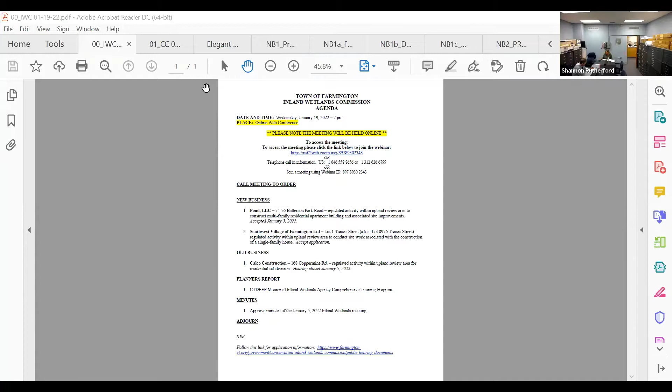All right, so first item on the agenda is Pond LLC, 74-76 Batterson Park Road. The applicant is here.

Is there anything they would like to present this evening? No, Mr. Chair, it's Tom Daly with SLR. As the commission knows, we went through a thorough presentation to this commission at our last meeting. With me was also Megan Raymond, who presented the findings of her report.

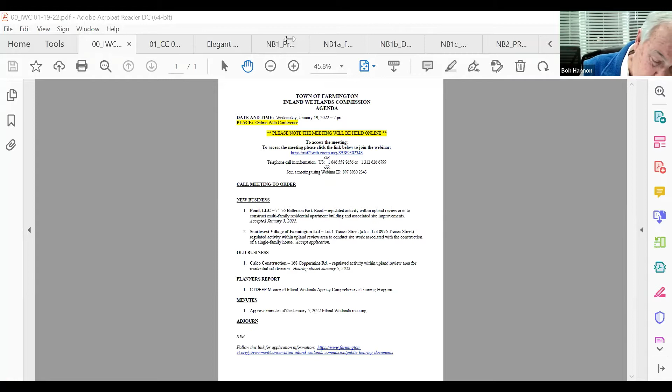So at this point, my understanding is the commission did a field walk, and we're here to answer any questions the commission may have. Yes, we did do the site walk. I'm just jotting down a couple of notes I have to remember for tonight's meeting. Bear with me. One is we have to render a decision on whether or not it's a significant activity or not, so I wanted to make sure I didn't forget to bring that up.

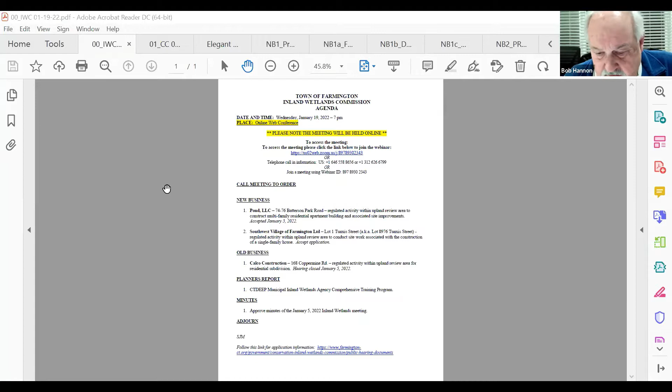I guess the applicant did make a pretty thorough application last time, so I guess we'll just start. Rich, I'll start with you to see if you have any questions, comments, or concerns about what was presented and if there's any information you're still looking for. No, I don't have any comments or concerns.

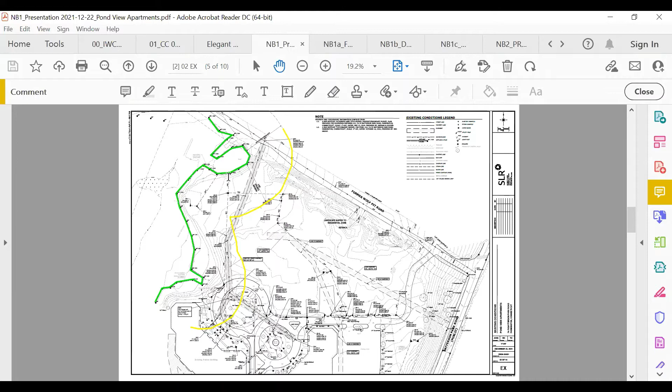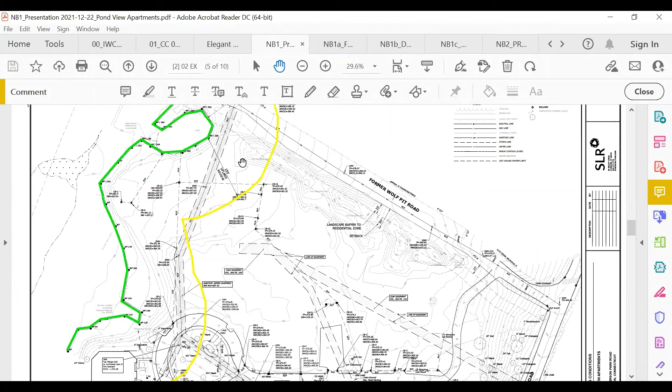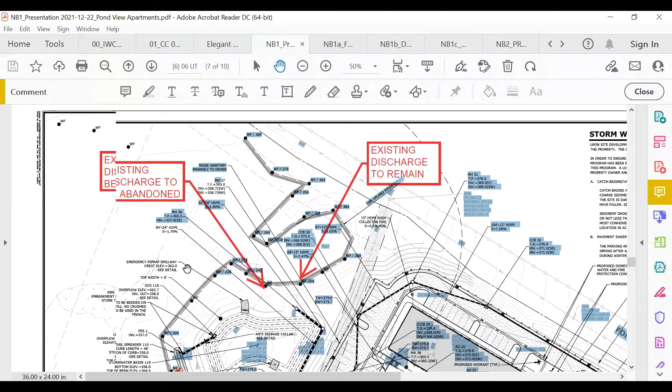The only concern I have is with the existing drainage that makes its way to the pond. I don't know if there are any sediment removal devices or hoods or things that would normally be included in a new application. In the presentation, you made notes of things you're going to do for the new development, and I was wondering if there was any consideration of retrofitting what's already there, since it discharges to Batterson Pond.

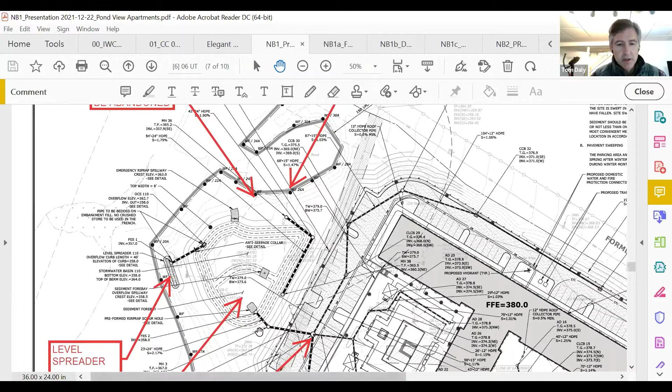For the record, once again, Tom Daly, and your point is well taken. Yes, you're probably right that things we were doing back in the 80s are probably not as good as what we're doing today. I think there is an opportunity, as you can see on the graphic below, we're rerouting the stormwater around the basin.

There might be an opportunity right where we hit the second or third manhole - the question is, could we pull back the outflow and put a sediment trap right there, pull it back and do more of a level spreader like we're doing for the new construction. That would provide some sediment containment just before it goes into the old pond. I think we could definitely accomplish that.

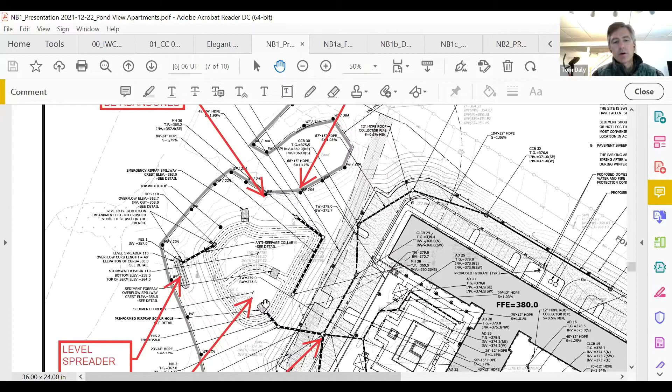Okay, how about the outfall from the office parking lots? I'd have to study that - obviously we didn't look too much at the old drainage discharges. I believe most of the water goes over to this area, but we'd have to do a deeper dive into the survey and find out what the discharges are. Okay, that's all I have.

Thank you. But we could work with town staff to see if we can do some retrofits. At a minimum, I think we can probably put a hood on those final discharges before they get out to get more sediment containment. Thank you. Thanks, Rich. Dave?

Yeah, I just had a couple of observations from the site walk. The old sedimentation basin, or small pond, in the northwest corner - we noted that the outfall leading towards the big pond closer to 84 was really clogged up with brush and fallen trees. It would be a good chance, I would think, to remove that impediment to flow.

Actually, Bruce called me about that, and we would have no objection to getting in there and cleaning it. Bruce was thinking that some of the trees fell down and were causing a little bit of backwater on that outfall. So when we go into this basin, we can strategically get in there with minimal impact and clear out that old brush. I think we can probably all agree it hasn't been maintained over the years, but we would have no objection to getting in there and cleaning that out.

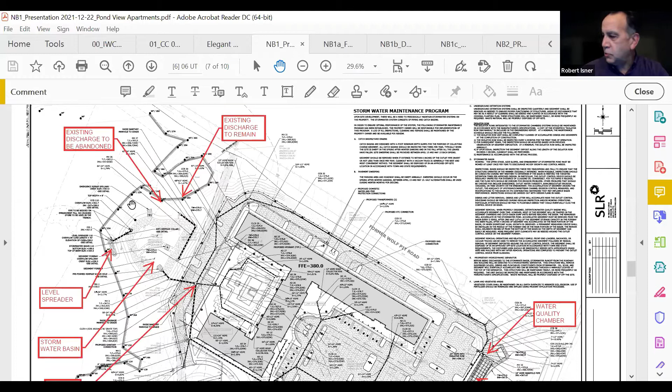Tom, I did have a question. There were a couple of catch basins that were in the field. Are those all going to be abandoned and removed? Yes. Okay, and then just from a safety perspective, the top of the catch basins are open, so they could trap some small wildlife or could injure someone if they're walking through the woods.

So even on a short-term basis, the tops of those catch basins should be covered. Okay. Bob, for discussion, or Commissioner Hannon, Chairman Hannon, for discussion purposes, I would not view this as a significant activity. It's certainly a regulated activity because of proximity to the wetlands, but I wouldn't view it as significant.

And then my final comment is with good soil and erosion control measures properly implemented and working with the town staff, there should be minimal impact during construction. And that should alleviate any significant or any potential impacts to the wetlands. End of my comments.

Thanks, Robert. Neil? Yeah, I don't have anything additional. Okay, thank you.

Mark? I would repeat what previously people said about what I saw on the site walk, the old drainage system going into the basins. Obviously we noted previously that it's blocked, but the whole system should be reviewed just to make sure it's functioning properly because it could have an impact on this project. That's it.

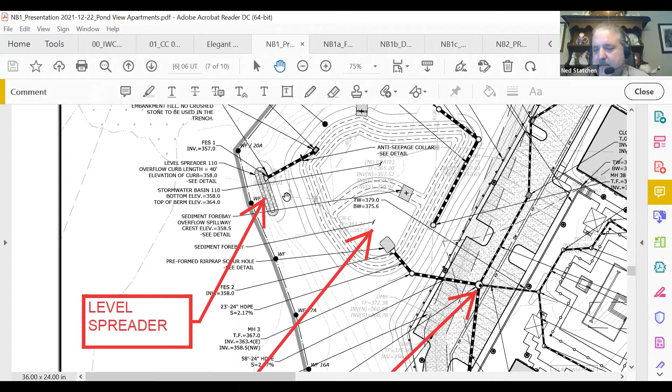Thank you. Ned? Yeah, just to recap, the pipe that we were looking at, that carries the water from the other section, that was about half full, and I'm sure it's not designed to flow like that. There's standing water, so the elevation of that drainage pond must be higher than it's intended, which is a result of the down trees and other things that are blocking the area.

So I understand that it's kind of separate from this project, but it is the same owner, so I think he should take some responsibility in maintaining that. And I think, you know, if that sedimentation basin isn't working properly, then it can affect the other one, the one we're putting in now. But yeah, I think that's all, really all I had.

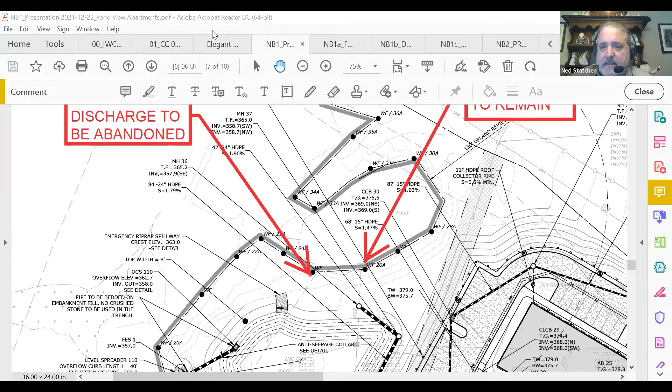I think that, you know, we talked about the catch basins and some of the debris that's there. I haven't made up my mind whether this is a significant activity yet. I'll just see where this goes a little more. Thank you.

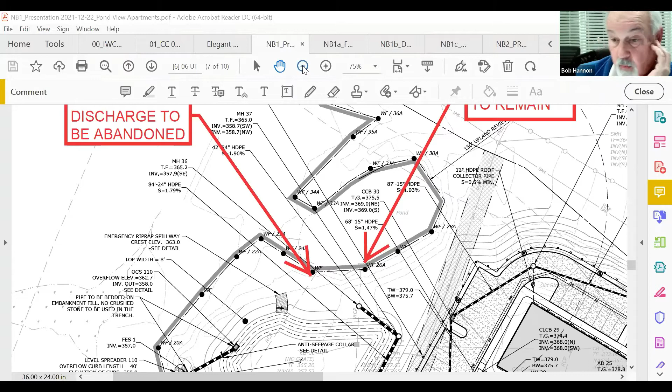Okay, thanks, Ned. I don't have much additional. The one thing I'm wondering though is because it looks as though, based on the mapping and what was done, a lot of this property was cleared back in the 80s and work really hasn't been done subsequent to when they put in the two buildings.

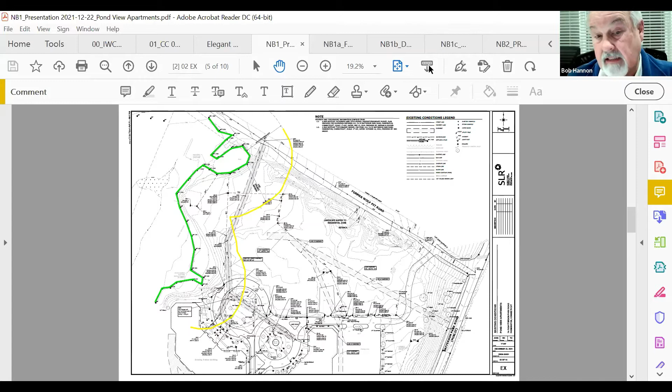One of the things that may need to be done is to provide more of an access point to that area, that small pond, so that people can in fact get in there periodically and maintain it. It's pretty overgrown right now. There's a bunch of trees right along the edge that are leaning into or falling into that pond.

But I think the bigger point that we need to deal with is where there's a large tree down and it's the outlet flow from there, which is why I think things get backed up in the pond. Like Ned was talking about, the amount of water that's actually in the pipe itself. And you get the ice on it, you know, the pipe is already half full, which my guess is it was never designed that way. So that's something that may need to try to work out.

I agree with Robert. I don't feel as though this is a significant activity.

The area has been looked at. I just think we need to make sure we clean up some of the things that haven't been addressed over the years from a stormwater perspective. But other than that, I don't really have any other questions. I think everybody else pretty much commented on that.

So Ned, you may have to make up your mind soon, because one of the questions I want to ask is what people's preference is as far as this being a significant or non-significant activity. Like I said, my take is non-significant. Robert said non as well. So I'll start with Rich so you can think a little longer, Ned.

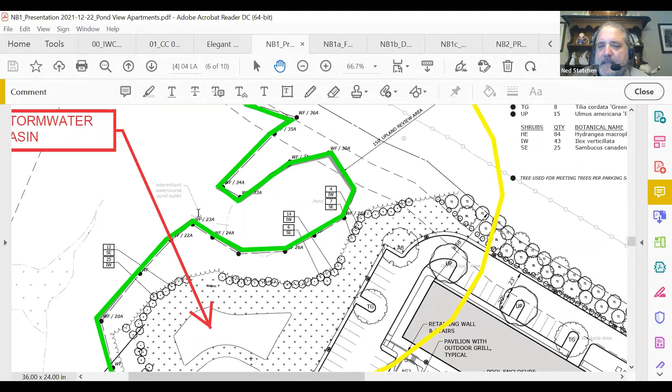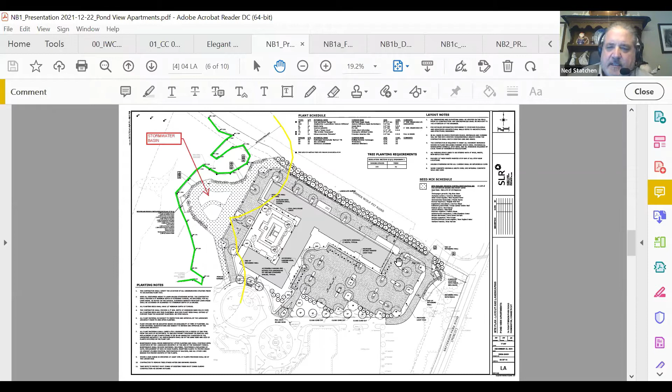So Ned, have you made up your mind yet? Well, my concern is the overall size of the project and the fact that half of the property is draining into a publicly utilized pond, Patterson Park Pond. I think if something were to go wrong with the water flowing into that pond, people are going to be pretty upset about it. I know they've got the drainage and the underground sedimentation collection on that side. So, all right, I guess I'll say it's not significant.

Okay, so it looks like the consensus is that this proposal is not a significant activity. Can I get a motion to that effect? So moved, as a regulated, non-significant activity. Is there a second? Mark seconds. I think everybody's pretty much voiced their opinions, so I'll just go straight to a vote. Those in favor of categorizing this application as a non-significant activity, signify by saying aye. Aye. Opposed? Abstaining? Okay, that takes care of the first issue.

What's everybody's pleasure? Do you feel comfortable enough to render a decision on this? We have notes that came in from the town. I haven't seen any engineering comments on this recently. Is there anything that's changed on that, Bruce? Are we up to date and current? Yes.

And is town staff content with what's being proposed, and have any comments been addressed? Yes, we had some minor comments in the actual agenda review. Okay, and I think they were all just minor. Oh, I apologize, not on this one — it was just an item to be discussed. I apologize.

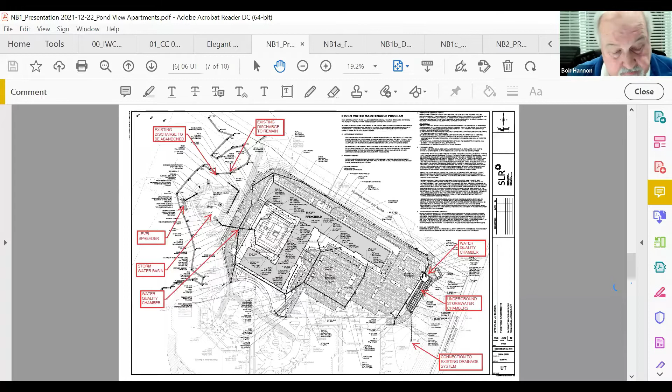Dave, anything you can think of? I agree with Rich about updating the old development, and maybe we should wait until the next meeting to see what the applicant comes up with in that regard. Okay, thank you. Robert?

I agree with Commissioner Fox that we're probably best waiting until the next meeting. I do think the assessment of the existing drainage system along with the proposed system is significant enough that we should get the assessment from the applicant's engineer and allow our town staff the ability to review and hopefully reach concurrence on no change, or what should be changed.

Tom Daly, if you can provide insight on the plan for clearing the debris and lowering the water level, and where the outfall for the proposed drainage is, that would be useful for our consideration at the next meeting. I agree with Chairman Hannon that we should include an integrated pest management plan with our approval, along with removing the heavy equipment tire and securing the open catch basins on the existing system.

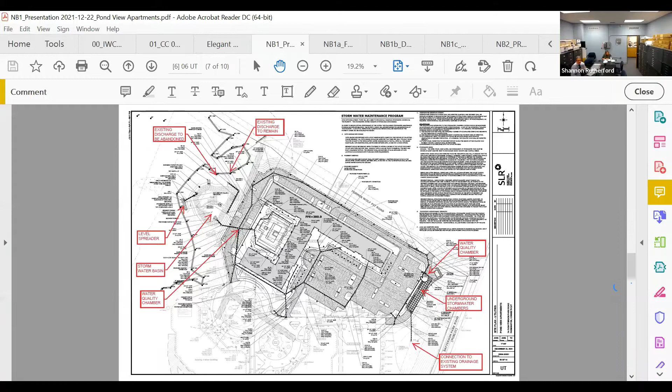Ned? I noticed this project was in the Farmington Valley Press this week, and I was wondering, David, has the town gotten any calls on it? No, I have not received anything. I agree with everybody that we should make sure the applicant has a chance to fully address our concerns, and then we could act on it in 2 weeks.

Thanks, Ned. I agree also. I think it's important to get a better understanding of what can be done with the existing stormwater system and maybe get that more up to date, because we've seen that area has not been maintained. I want to make sure what we're dealing with going forward is more consistent with today's standards.

Tom, do you have any questions? No, I'm clear as to what the commission's looking for. Is that something you think you can get, talking to town staff in a relatively short period of time? Yes, with clear indication, yeah.

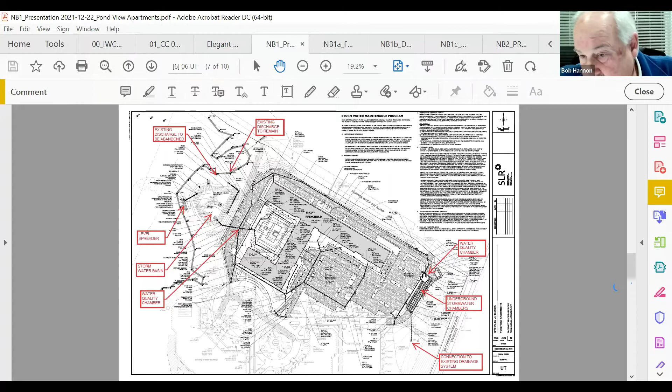Okay, based on what I'm hearing, we'll continue this to the next meeting with no vote tonight, but we did vote that it is not a significant activity, so we do not need a public hearing. Thank you very much, appreciate it, see you in 2 weeks.

Next on the agenda, Southwest Village of Farmington Limited, Lot 1, Tunxis Street. This application just recently came in, right? Yes, the activity today, if anything, would be just to accept the application. Exactly.

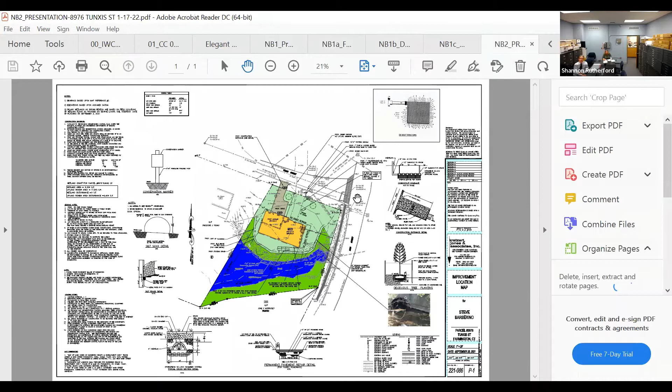Sev, are you on? He was on, I saw him earlier. I think you may be muted. Yeah, I'm gonna work on getting him unmuted. Can you hear me now? We got you, Sev.

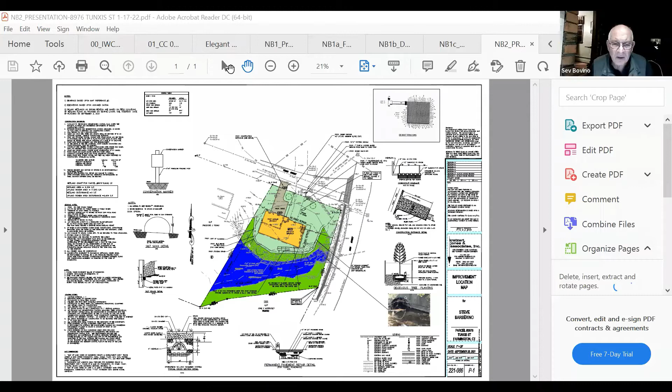Okay, thank you. Good evening, Mr. Chairman, Commission members. My name is Sev Bovino, planner with Kratzert, Jones and Associates, representing the applicant. The property in question is located at the corner of Main and Tunxis Street, identified as parcel number 8976 on the assessor's map, in the southwest quadrant of the intersection. As shown on screen, the top of the sheet is north, and that is Tunxis Street, and to the right, east, is Main Street. The land area is 24,171 square feet.

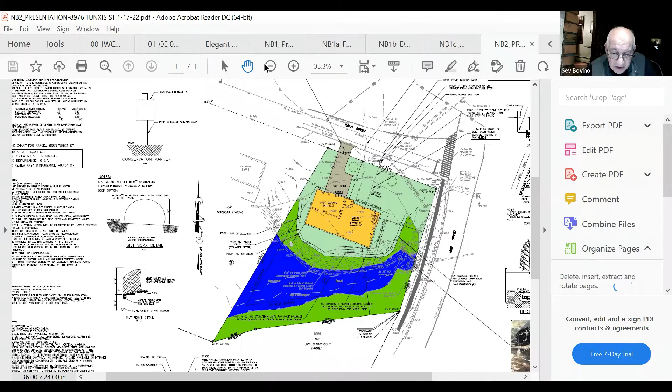It includes wetlands associated with the brook that runs east to west in the southerly area of the property, shaded in blue. The northerly portion of the property is rather flat, up to the top of slope, then drops to the brook about 11 feet. The house is proposed in the flat portion of the property, close to Tunxis Road. The house, driveway, and proposed utilities will be in the 150-foot upland review area.

The disturbance is 9,454 square feet of the 17,815 square feet of upland review area encompassed on the property. We do not propose any wetlands filling or disturbance.

A soil report by George Logan was submitted with the application. The upland soils are udorthents. The wetland soils are Saco soils associated with the floodplain along the brook. All appropriate notes and details are shown on the plans. We received staff comments and do not object to them; the map will be revised to reflect the changes addressing the concerns.

One of the comments relates to the setback along Tunxis Road. That was a surprise to us, but we're happy we can move the house closer to Tunxis Road. Currently the house is 41 feet from the street line; we propose to move it to 30 feet to comply with all setbacks and have plenty of room from the front of the garage to the roadway, so cars do not encroach or sit close to the roadway.

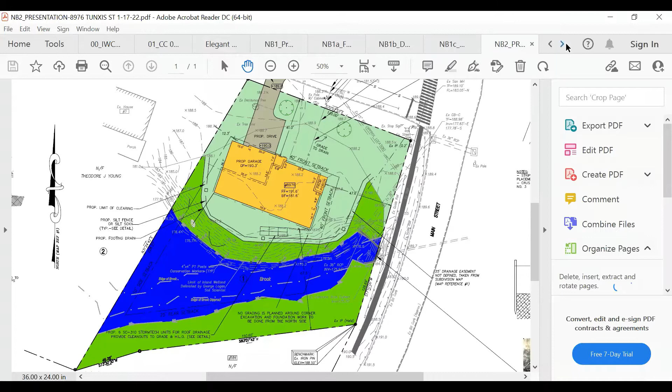The non-colored map that was submitted has the conservation easement as contiguous with the wetland boundary. Yeah, we have no problem with that. Is that what you're proposing?

Yes, I don't think they depicted the conservation easement, if you don't mind if I interrupt, because that was one of the comments I had: where exactly is the conservation easement? I think there was one arrow pointing to it, call it a marker, a 4x4 post with conservation marker, pointing towards... oh, there it is, yeah, it's right on the wetland flags. All right, yes, I missed it.

It is there. I think it would be more appropriate to have it at the top of the slope, because if you start making deposits of material or clearing, whatever disturbance is going to quickly get into the wetlands. So it would be much more protective to have the conservation easement there. We have no objection to that. Okay, that's all I have, thank you.

All right, thanks Dave. Robert? I agree with the comments by Rich and Dave. Is this an actual house dimension, or is this just a schematic as to what's going to be built? No, this is an actual house dimension. There's an actual house plan that was developed by an architect. We first had a basic box, like a rectangular shape, but this is an actual house.

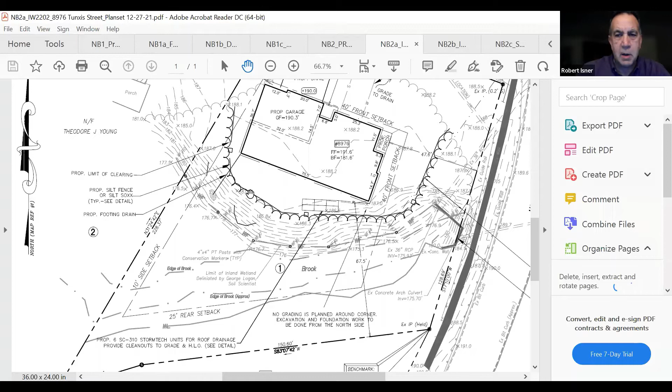Okay, thanks Robert. Neil? Just to clarify, this map, you're going to move the house from this location - did you say about 11 feet towards Tunxis? Yes, the back range of the house would be probably right here. This dimension here is 14.7, so if we move it 11 feet, the back range will be just about right here, so there'll be room to come around.

Okay, and you're not twisting it at all, it's just the whole thing's going to shift? The whole thing is going to shift towards Tunxis Road. Okay, all right, thank you. Nothing further. Okay, thanks Neil.

Mark? I have nothing to say. A lot of questions have been asked, and the answers are, I got my answers. Thank you. Ned?

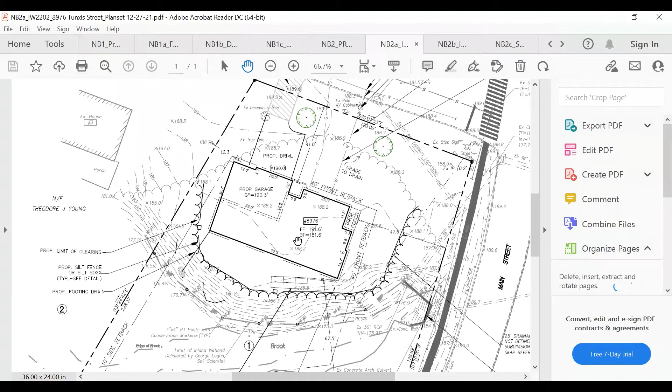I assume the steep grade, elevation lines that come past where what's going to be the area left alone with the brush lines there, those are just going to be flattened out, or because I don't see any new contour lines.

Yeah, we're trying to keep the grades as close to the existing grade as possible. And actually, Bruce requested that we show some spot grades, which we will on the revised plan.

You can see the proposed floor elevation is 191.6. The existing grade around the house is 188. So normally you got 3'6" from the grade to the finished floor, 1 foot for the deck, so you have about a 2.5 foot drop from the top of wall to the surrounding grade, which will allow a few steps or a small patio to be used back there. So it works well with the grades.

Okay, and the other thing is, we have a steep grade here, and I've seen this pond really get ripping here, this river, brook. Are they going to do anything for slope protection on this?

Yeah, we're gonna have a silt fence, mulch log, and obviously it's gonna be seeded to stabilize the area. We're not gonna touch the top, the banks themselves. They're already vegetated, and there's some growth on it.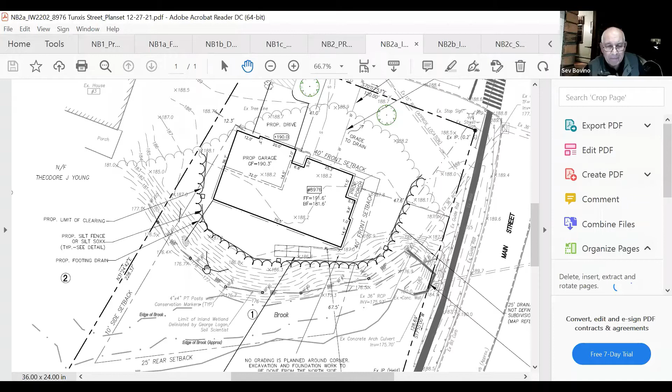Okay, that's all I have. Thank you. Okay, thanks, Ned.

I'm making an assumption on this, but based upon looking at the topography, I'm assuming that this lot has been filled in a long time ago. This is a lot of record that's been like this for many years. The growth on it, we have trees that look like they could be 60, 70 years old.

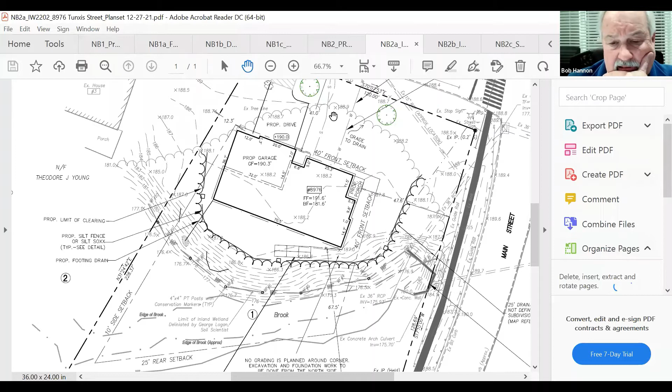Okay. Yeah, I mean, I agree with the comments from other folks. And again, it looks like, just trying to, yeah, the one thing that might be able to do is work with the town staff.

I'd like to see a little more detail about where you've got the proposed clearing down at, I guess it's the southeastern corner of the site, where you're clearing some of the slope. I'd just like to see something there to figure out how that's going to be stabilized a little bit more while any work is going on.

Because again, I think with what you're talking about as far as the growth that's on the embankment, you are better off leaving that there. It stabilizes the soil, makes things a lot easier to deal with, and it's been like that for a while. So I don't think it would be a good idea to start changing that.

But I'm just curious as to how that area in that southeastern corner is going to be addressed. So that might be something you can pull together, just some general information for the town staff, for stabilizing purposes. We could, Mr. Chairman, place some modified riprap here to stabilize it even more.

And the house is going to be moved 11 feet, so there will be an opportunity there to do something there. And actually, we can move the limit of clearing from here, move it up closer to the top of the slope in this area.

And that's kind of where I was going with it, because we've typically done, like in other sites where we've had conservation easements going, we try to prefer the top of the slope, so that hopefully you eliminate people's intention of disposing of things on a slope where it's out of sight, out of mind, and don't particularly want to do this with the brook down below.

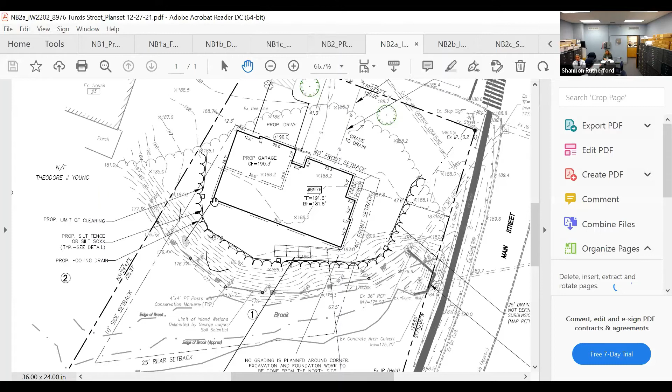And one of the other things, I don't know if you discussed it, was the clearing of some of the fallen trees on the property that can possibly help with the runoff flow. Yeah, we discussed that as well, and they have no problems doing that. I put that in the draft resolution. That should be done as part of your initial clearing of the property. I don't want to wait for that - let's get that opened up as soon as possible.

I guess at this point I'd like to take the commission's temperature about how they feel about the application. So Rich, start with you maybe?

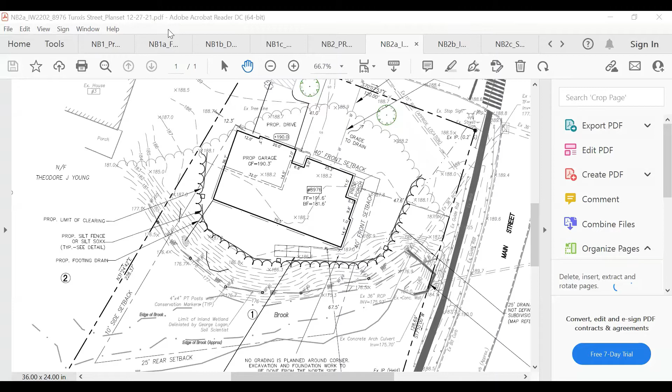There, finally unmuted. I think the applicant has gone to great lengths to try to infiltrate and not create problems for the neighbors as much as I think is possible. So at this point, I really don't have concerns with this proposal.

Okay, thank you. Dave? I guess I had one follow-up question for Bruce. With the various sump pumps that may or may not be needed, and infiltration of roof runoff that may overflow, are we confident that the new enlarged basins are big enough that there won't be an increase in runoff? At this point, yes. There's not a very good way to actually quantify the volume of water you would anticipate from that, but we did enlarge the systems quite a bit - I think about 30%. We had them do that for each one, and on top of raising these, trying to get them more out of the groundwater. So for footing drains and sump pumps, that should actually help as well.

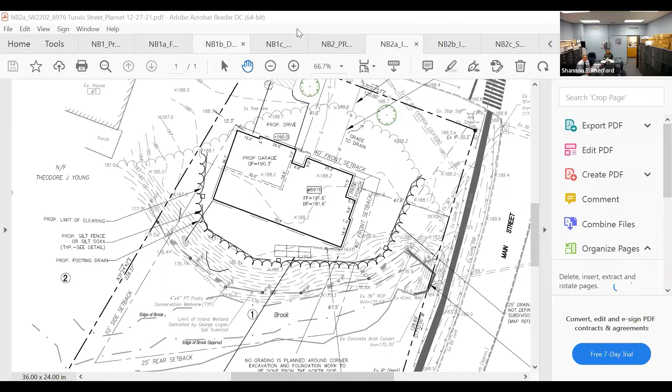Okay, thank you. Yeah, so overall I would agree with Rich that the applicant's done a really good job trying to deal with the stormwater issues. I looked back at the denial from 2015, and they've obviously done a lot from that perspective as well - a lot more vegetative buffer, keeping the basins mostly outside of the canopy, mimicking the existing drainage patterns that flow towards that water course. I think that provides a lot more protection to the cold water tributary of the Unionville Brook. So yeah, I'm fairly comfortable at this point as well.

All right, thanks Dave. Robert? I also have a question for Bruce. You said you're still reviewing some potential redesign of the footings and sumps for some of the basements - is that an ongoing review? Yeah, that's kind of more, as we were saying with them, it felt more of an out-of-wetlands review at that point, more of an engineering and TPZ review. So that's kind of how we worked with it. They're not going to be submitting any revised plans because we can't accept anything at this point, but the understanding was that we'd work with them and they would look at raising those basements up a little bit just to get them outside of that high groundwater. Great, thanks, that's very helpful clarification.

I think we spent a lot of time going through the application. We've heard a lot of information, so I'm going to put on my wetland regulation blinders and look at the project from a wetland regulatory perspective and a wetland impact perspective. In doing so, I think the project has been appropriately designed. I think the conditions that have been drafted reasonably address all of the concerns to the extent that we can. There were some hypothetical questions or concerns raised by some of the neighbors, who I understand have concerns, but I don't think the speculation is enough to warrant an adverse decision or denial of the application. So, subject to further discussion with other commission members, I would be leaning towards working with the draft motion to approve the application. Those are my comments for now.

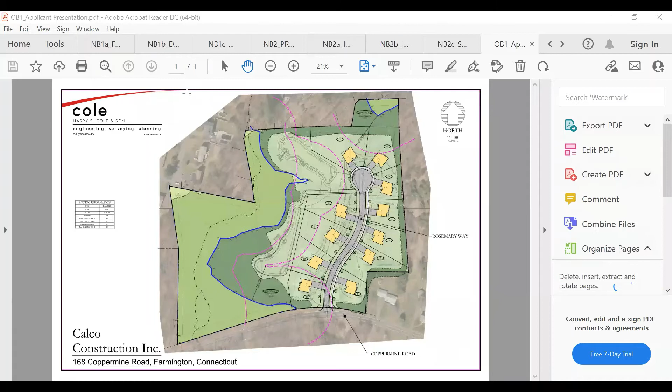But from a wetlands point of view, what they're doing with the basins and how the water is being captured and mitigated into those areas minimizes the impact on the area. I think from a wetlands point of view, this project meets our standards—they're taking due diligence to make sure the impact to the wetlands is minimal. So I see this as a project that can go forward.

Thank you. All right, thanks, Mark. Ned?

I do think they made some efforts in trying to better situate the homes on smaller lots. But I think the biggest problem here was that they just tried to squeeze in too many homes. I really wish they had gone from 12 to 10 instead of 12 to 11, taking that last one on the cul-de-sac out, giving it less runoff—even maybe taking both of the end ones out. That would have been a better way to address this. I understand they're trying to get as many homes on there as they can.

But I think it would have been better handled by cutting more than one house out of the project in the redesign, and they didn't do that. So I don't think they've gone as far as they should have in trying to redesign this project.

Okay, that's it? That's it. Okay, thank you.

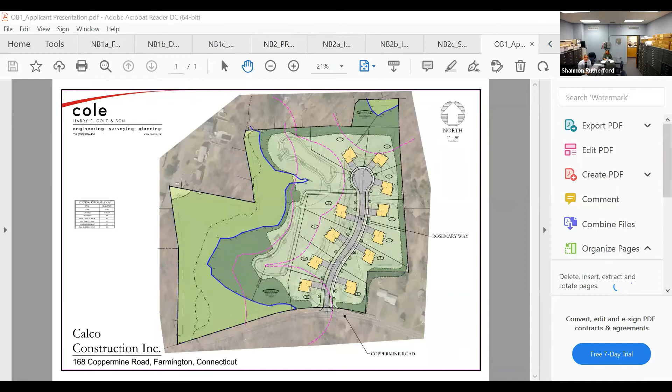One of the questions, Bruce, I have for you is because one of the original issues was hooded catch basins for sediment control—are all of the catch basins here proposed to be hooded, or just one or two? Just a couple. They're going, if I'm not mistaken, with all 4-foot sumps.

Give me a second here. Well, no, that's okay, because my take is going to be a condition I would like to see—I would like to see all the catch basins hooded. All of them? That's one of the things we originally looked at. I think we need to be consistent with that approach. So that's why I'm bringing that up.

I think they've gone in and increased the use of low impact development principles. I also like what they're doing in terms of the level spreaders and how they're trying to infiltrate water from that. There are other issues I could go into, but I think a lot of the stuff has basically been addressed. So I do feel as though the design proposed at this time is much more suitable for the site than what was originally proposed.

And this is the project—I actually had to take out my hydrology book to look at some stuff. So thank you for helping me get the dust off of one of my books.

But I'm fairly well satisfied with a lot of the work that has been done on it. Whether it's 11 houses or 10 houses, that's outside of our jurisdiction. That's really going to be planning and zoning. So it could end up being 10, I don't know, but that's not the wetlands issue. So I'm not going to really focus on that.

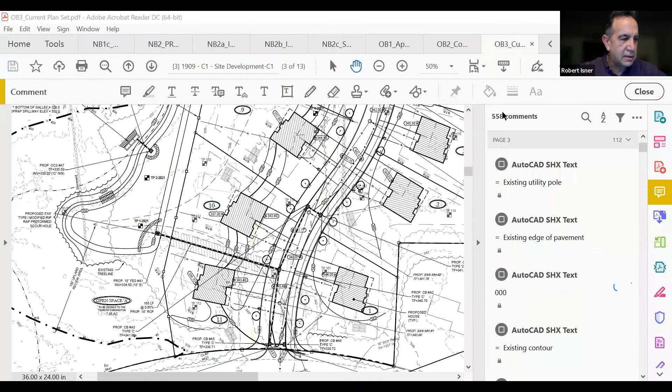Sorry, I wrote 20, Shannon and I wrote 21 of these things. I've gone through them so many times.

No, that's the clearing of the fallen trees and other debris in that wetland area. He's talking about the lot area itself, I think, right? You mean up in the lot area, back up in here? Yeah, well, you've got the barn and you've got a lot of agricultural materials left on site.

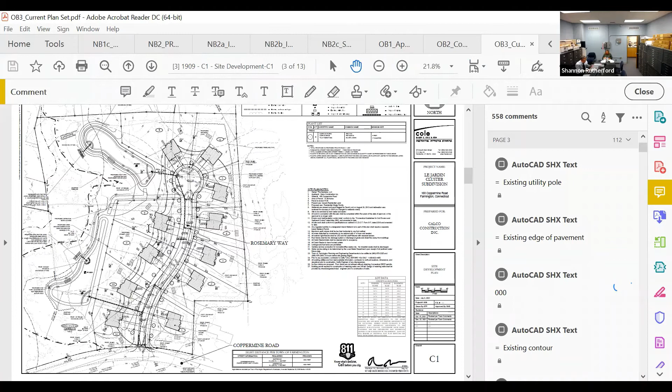Yeah, we were talking down here with the conditions, but yes, I can add that. I apologize, you did say that, and I will add that to the condition. Yeah, because it really was sort of throughout the site.

The area that was of most concern, as I said, was sort of over the stone wall on the wetland side. And again, the amount of debris was more than we usually see - the types I already said, glass, metal, and plastic containers. Some of those were agricultural containers. There were a fair number of tires. There was some old agricultural equipment, scrap metal, and dimensional wood, scattered throughout the property in a couple of isolated pockets. We had discussed that it would be removed manually without the use of heavy equipment so as to not disturb the wetland as possible.

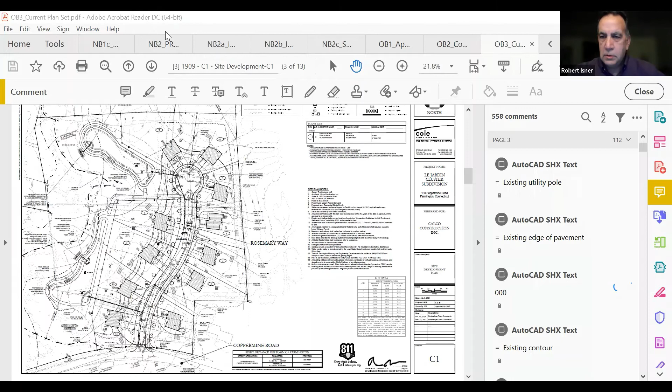Okay, thank you. Thanks for that, additional time, Mr. Chairman, because what you just mentioned reminded me of something.

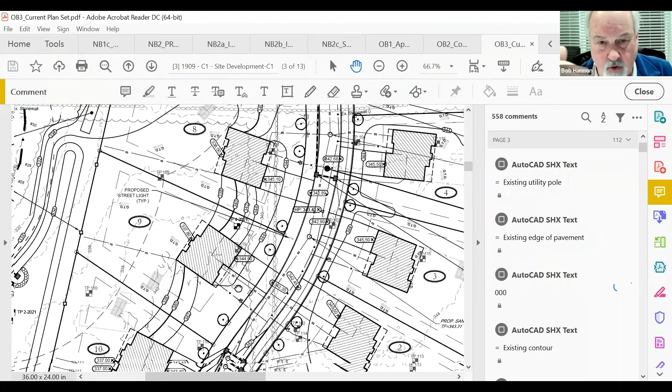In terms of the stone walls, Bruce, they're supposed to be leaving the exterior stone walls, right? Which ones going through the lot, they stated they're gonna try to utilize them on site again. So the stone wall to the east and the stone wall to the north, those are remaining. That's my understanding, yeah, they don't call for anything there to be removed. We could add a condition to guarantee that. Some of it has to do possibly with drainage, and if you start opening that up, you may end up changing some of the flows a little bit. So I prefer to see the perimeter stone walls remain as much as possible, and I believe that was also part of the hearing itself.

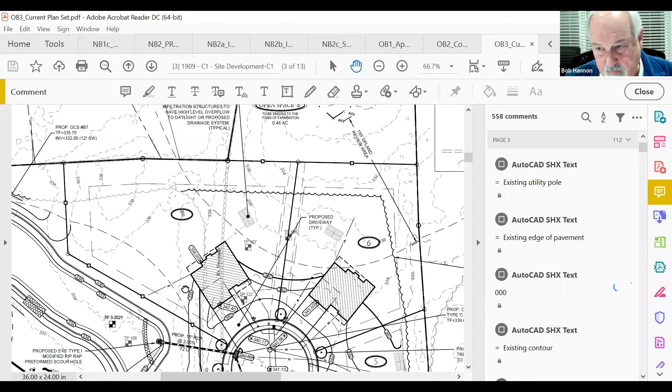So yeah, I would like to see something like that added. And one of the comments I made, which I hope they would do, is to possibly be able to reuse some of those stones to put something decorative more in front of the subdivision. So it still creates a little bit of that buffer, but an agricultural type look. That was discussed both in the field when we had the site walk, and during the public hearing process, because they've got plenty of material on site to use and not have to bring it in.

Do you want to add that in as a condition? Well, it's not so much a condition, I just thought that's something they should look at. That's not going to be a wetland issue, I don't think we can make them do it. But it was brought up just to start the thought process that they at least think about that. But the perimeter stone walls on the east and the north, that ties in with some of the flows, so I think that's more related to some of the wetland areas, but I can't say that for the frontage.

That's okay, I don't think it can be a condition, but at least they're thinking about it. So getting people's opinions on this. Does somebody want to make a motion to approve the application with those additional conditions that we have been discussing? And if we need Bruce to go ahead and highlight what some of those additional ones are, we can ask, but I don't know if somebody wants to make a motion.

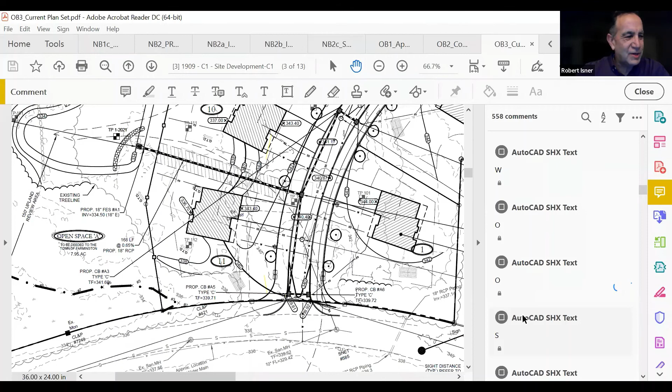Okay, all right, thank you. Next up, planner's report -- and Sandy, please, thanks for all of the time and energy on this application, there are a lot of documents generated. Please share our thoughts with Shannon. Shannon actually carried it all over, so I just kind of took it over the finish line. So that's fine, thank you. Yes, we all thank you, everybody's effort is much appreciated.

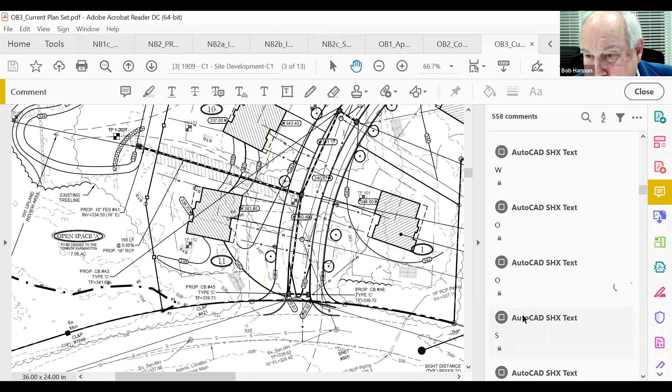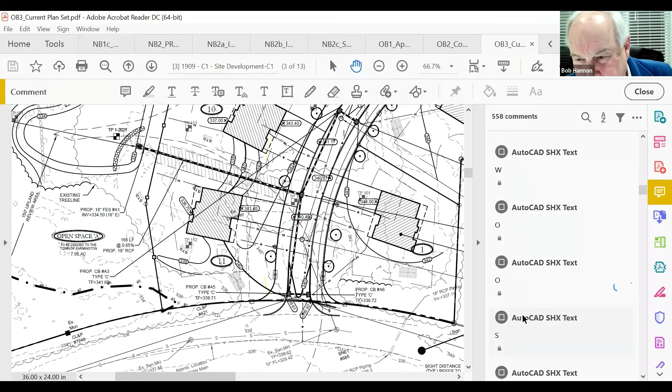What was that, Sandy? Yeah, it was canceled again. When's the last time they met? October, November, yeah, something like that. Been a while. You talking about 21 or 20? 21. Okay.

Planners report, you have nothing? Nothing. Okay, next is the minutes.

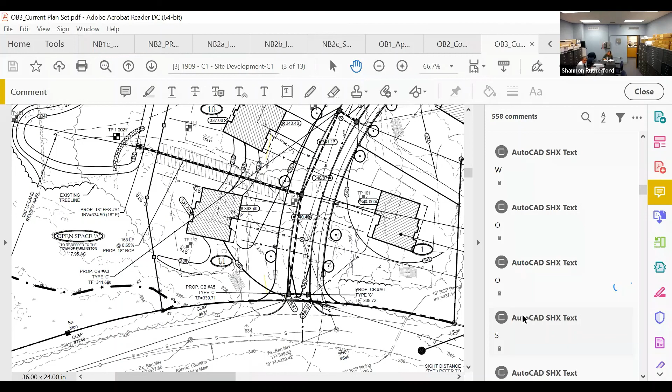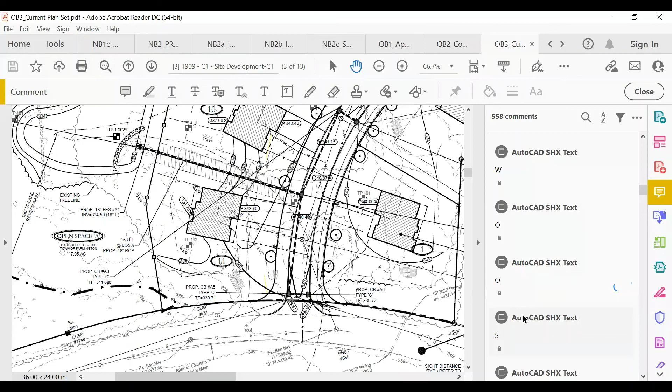Can I get a motion to approve the minutes of January 5th, 2022, the Conservation Commission meeting? So moved, Mark. Is there a second? Second, Statchen. I have a motion on the floor to approve the minutes of the Conservation Commission, January 5th, 2022 meeting. Those in favor, please signify by saying aye. Aye. Aye. Aye. Opposed? Abstaining?

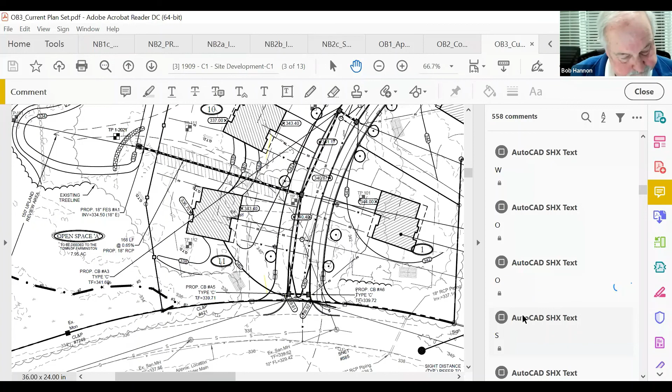I think we're done for the evening, folks.